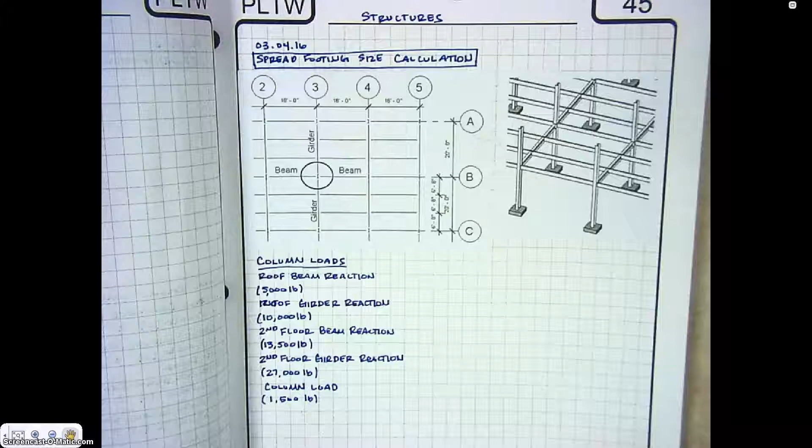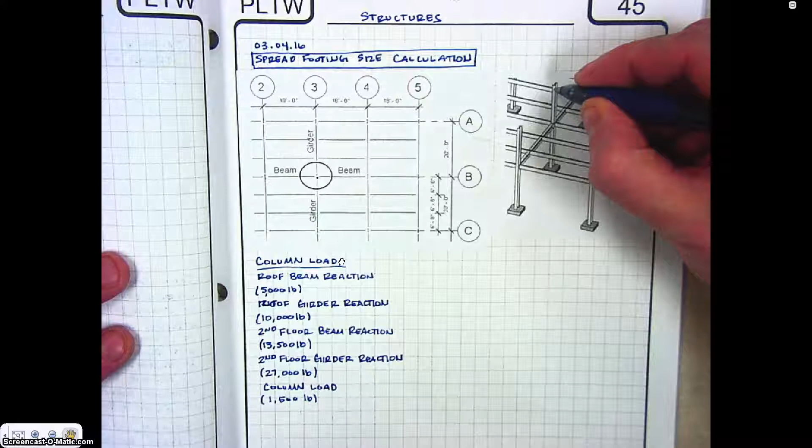All right, I'm going to take you through the steps on how to calculate the size that a footing needs to be and able to support a calculated load. In our case, we have a column right here. This is our column, so I'll go ahead and label it. It's our column. We have two girders that are hooked to the column.

So we have a girder here. We have another girder over here. So go ahead and label those. We have two beams that are hooked to our column, here and here. Beam one. Here's our other beam.

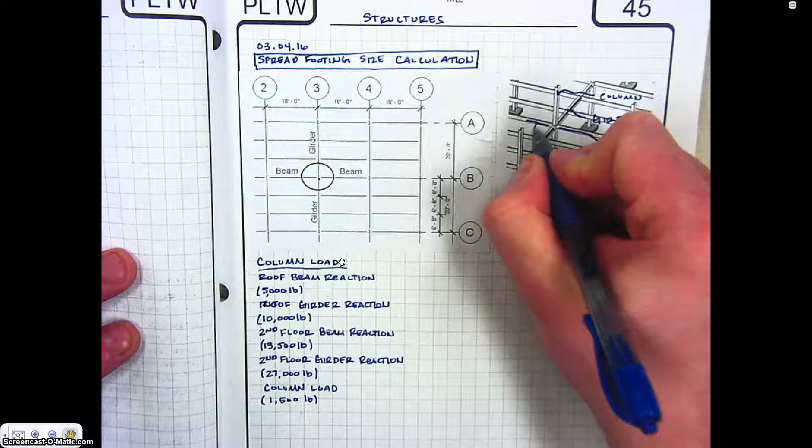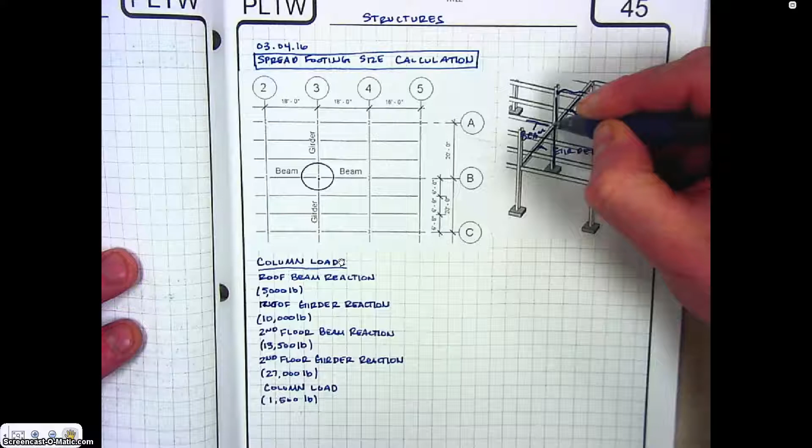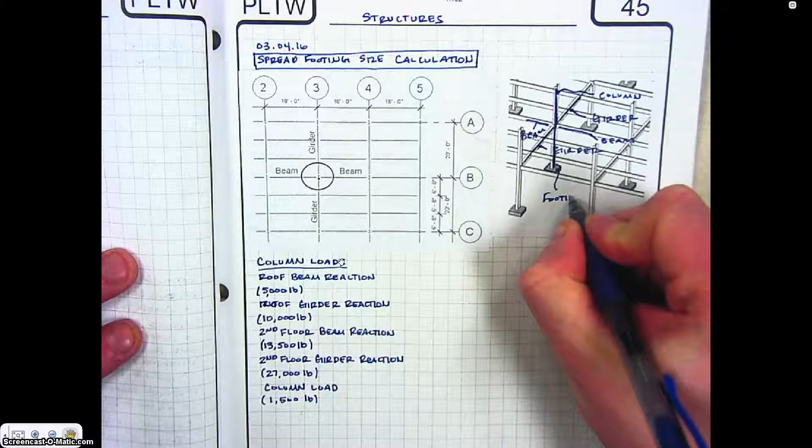And so what we're going to be doing is calculating how big this footing down here has to be to support all the weight that each of these girders, beams, and the column are supporting. And so right here is our footing. So again, what we're doing is figuring out how big that footing needs to be. In our example here, we're going to have two floors. So this column is supporting both the roof and the second floor.

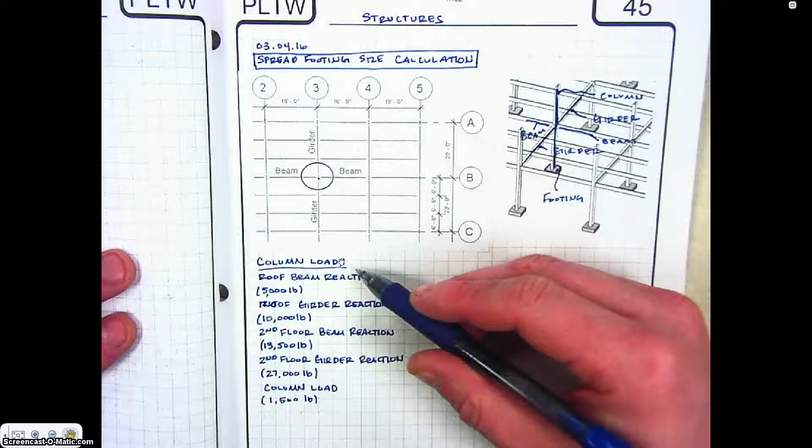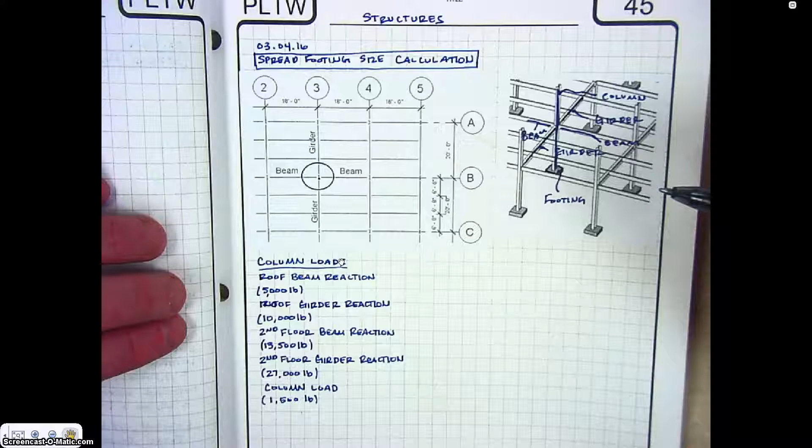And so the first thing that we'll do is figure out the total column load, or how much load is being applied to that column. For the sake of this example, we're going to pretend that an engineer has already done the calculations for the live loads and dead loads and figured out the loads on each of those beams and girders.

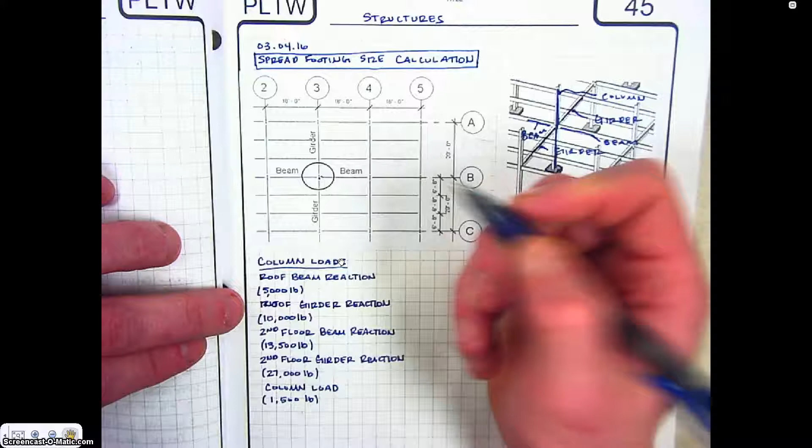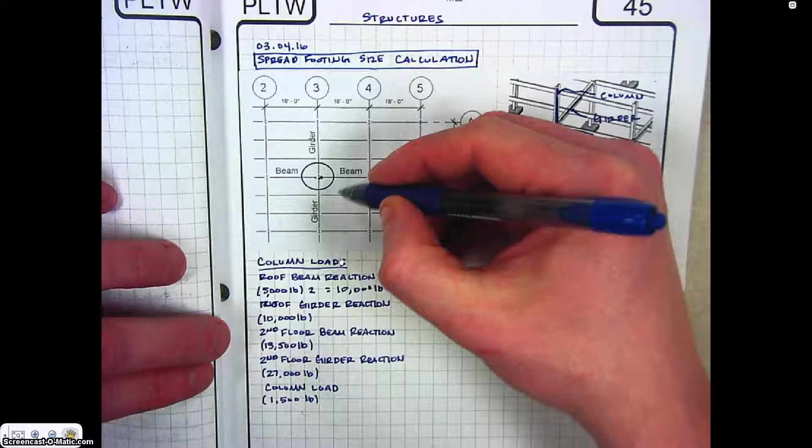And so for our roof beam reaction, we have 5,000 pounds. What we're saying is at this end of the beam, there's going to be a 5,000 pound reaction force going into that column from this point on the beam. All right, we have two beams, so we need to multiply that number by 2, which gives the roof beam reaction of 10,000 pounds. We also have the roof girder reaction. Here's our girder, here's our other girder. We have two of them. So for the roof, we have 20,000 pounds.

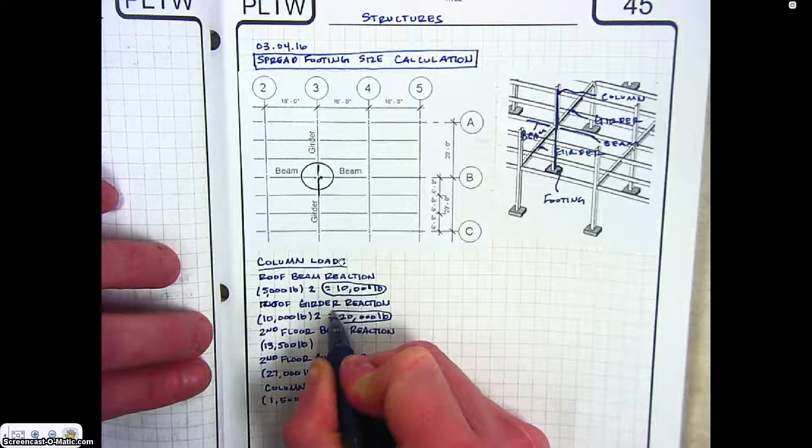Now remember that in this example, we're going to support the roof with this column, but we're also going to support the second floor. And so our second floor beam reaction, right here and here, has 13,500 pounds. So we have to multiply that by 2, and we get a total of 27,000 pounds. Our second floor girder has a reaction of 27,000 pounds. So we have to multiply that number by 2, one for each side, and we get 54,000 pounds.

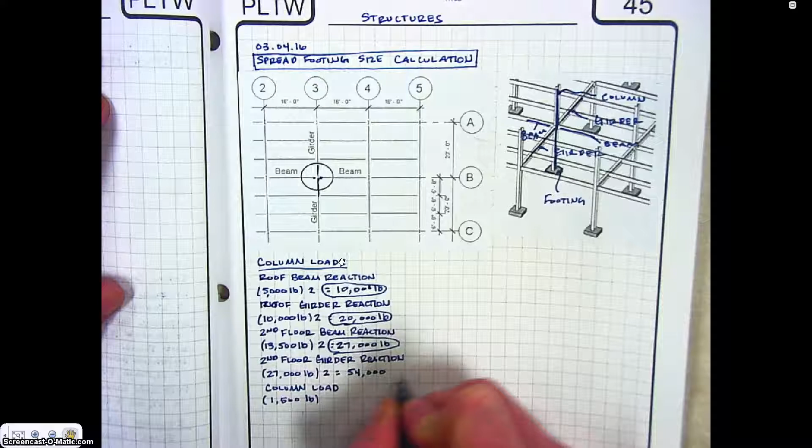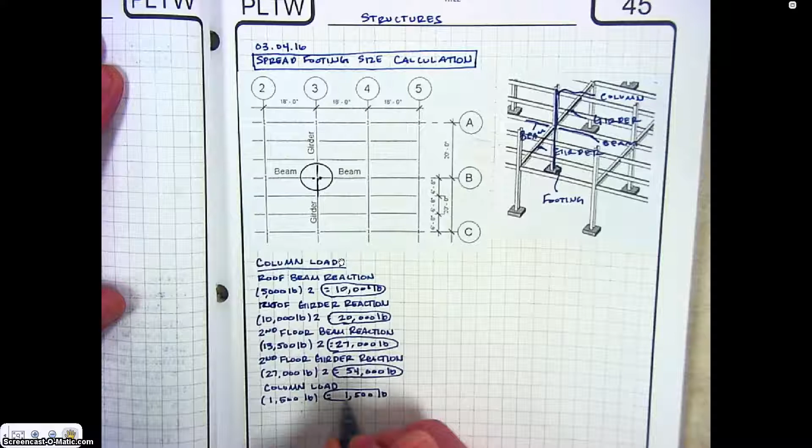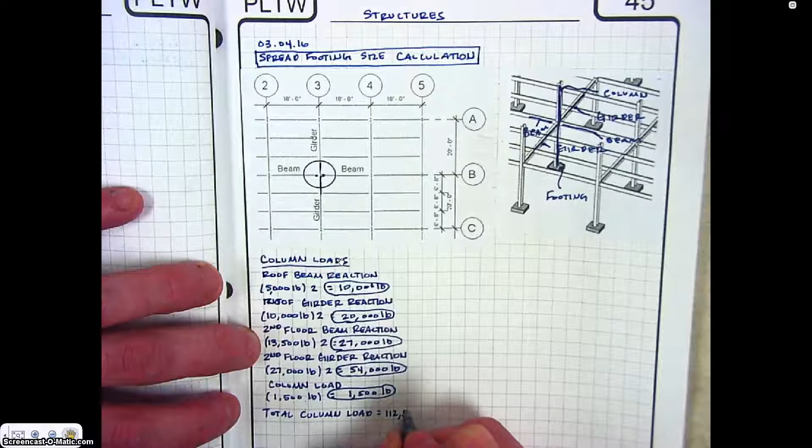Okay. The last thing we need to know is how much the actual column weighs itself. So our column weighs 1,500 pounds. We do not need to multiply that by 2 because there's only one column supporting all that. So it's just equal to 1,500 pounds. You add all those numbers up and you get a total column load equal to 112,500 pounds. So that's the number we'll use in our calculation when we're trying to figure out how big we need to make that footing.

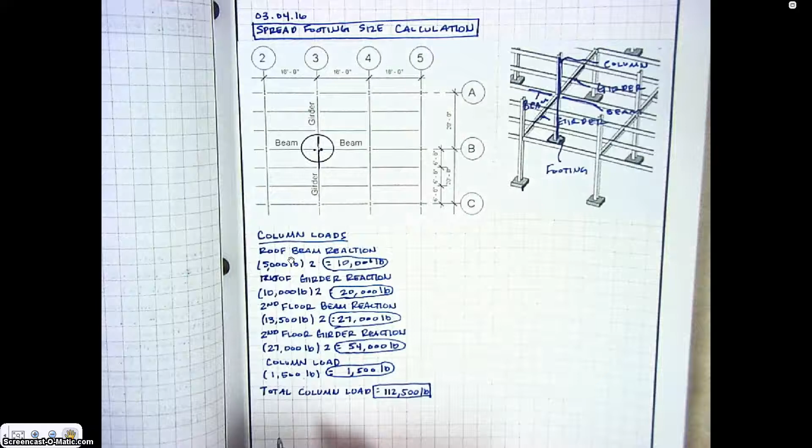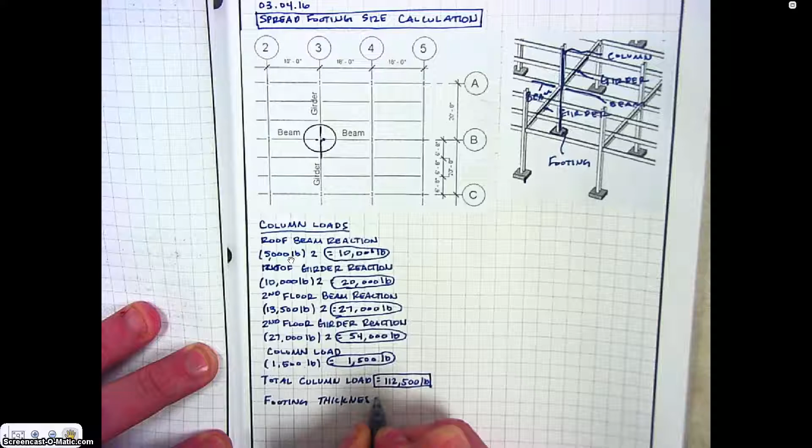We're going to have another given in our problem, and that's the actual thickness of this footing. For this standard project, we're going to say our footing thickness is going to be equal to 1 foot 9 inches. If we convert that number to feet so we can use it, it would be 1.75 feet. And so that is our footing thickness that we'll use.

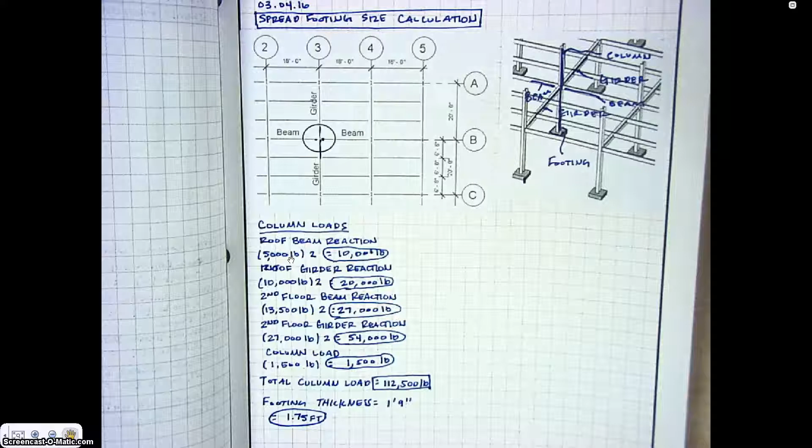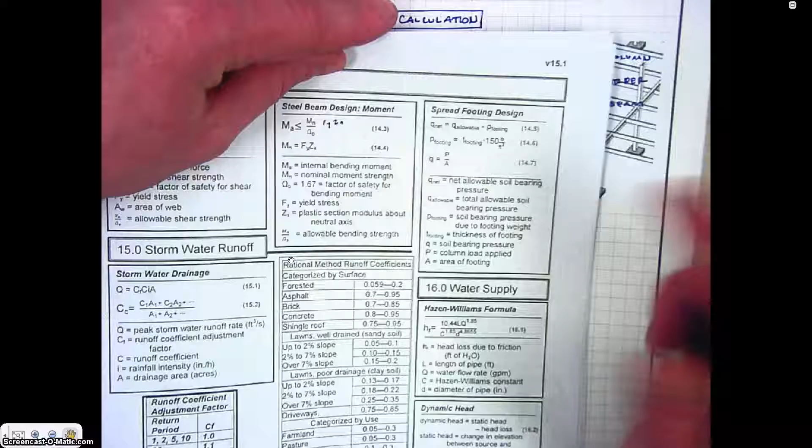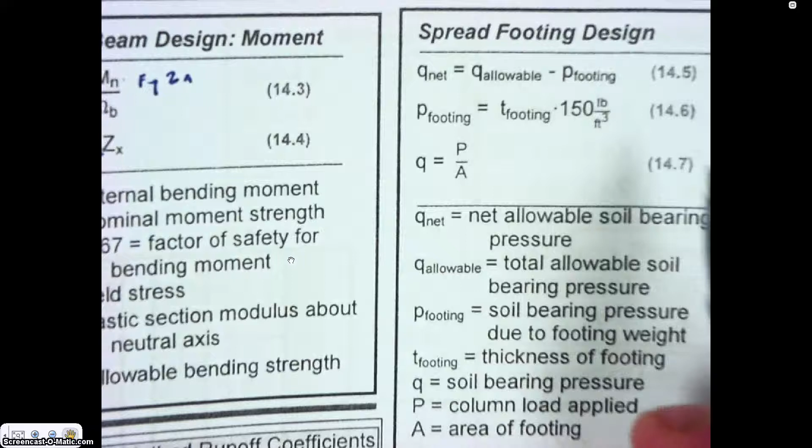All right, now we'll look at our formula sheet, and we're going to figure out the soil-bearing pressure due to the footing. If we look at our spread footing design formula, we can see that the soil-bearing pressure of the footing is equal to the thickness of the footing times 150 pounds per cubic foot. All right? And so we'll go ahead and run through that calculation.

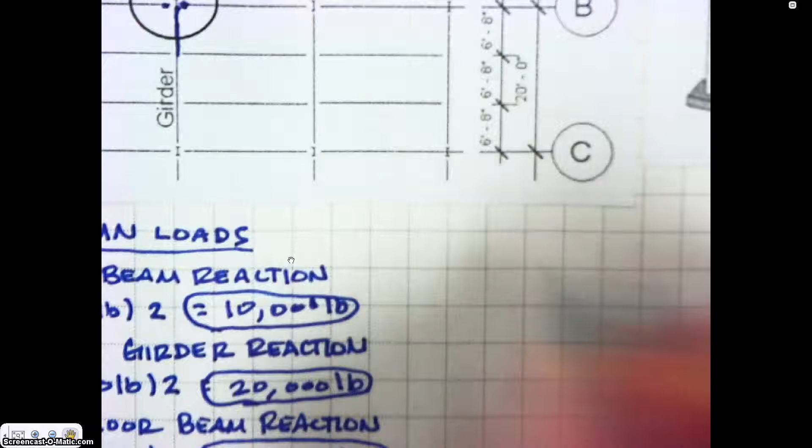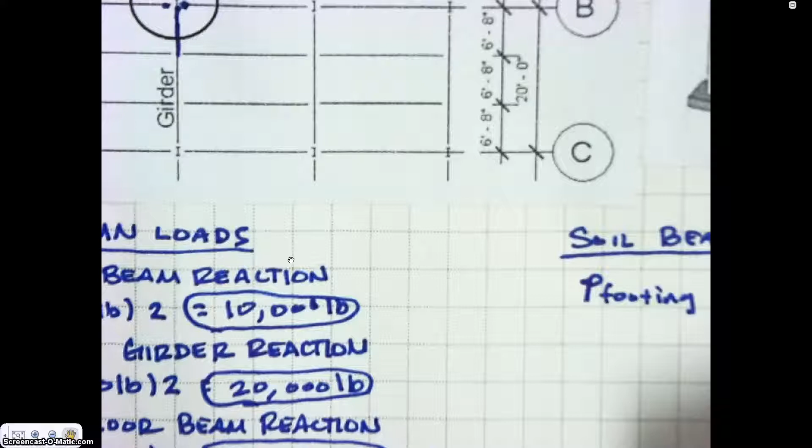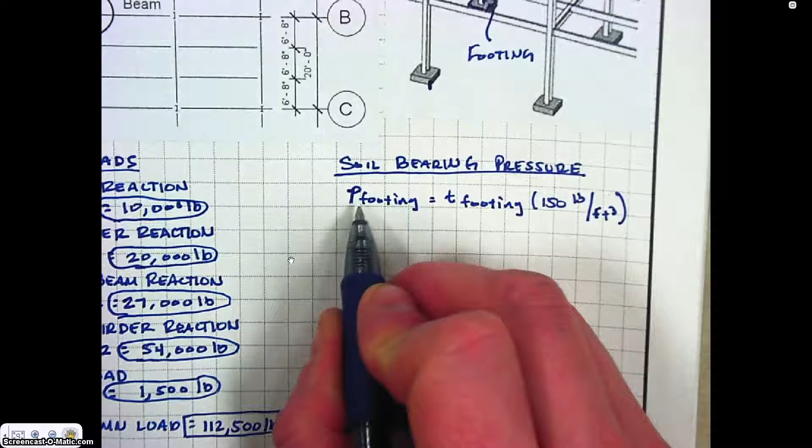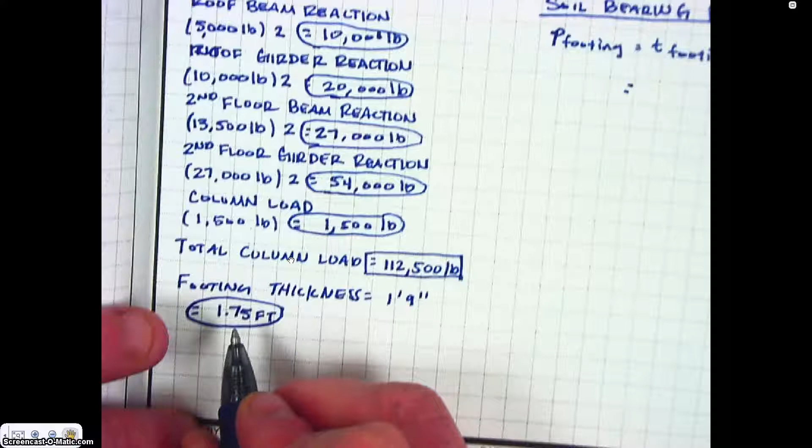So I'm going to write soil bearing pressure, which we're going to be calculating. The soil bearing pressure of the footing is equal to the thickness of the footing times 150 pounds per cubic foot. Let me zoom out so you can see that. There it is right there. So we have the soil bearing pressure of the footing is equal to the thickness of the footing times 150 pounds per cubic foot. And so we'll go ahead and put our equal sign. We know the thickness of our footing from our calculation down here is 1.75 feet.

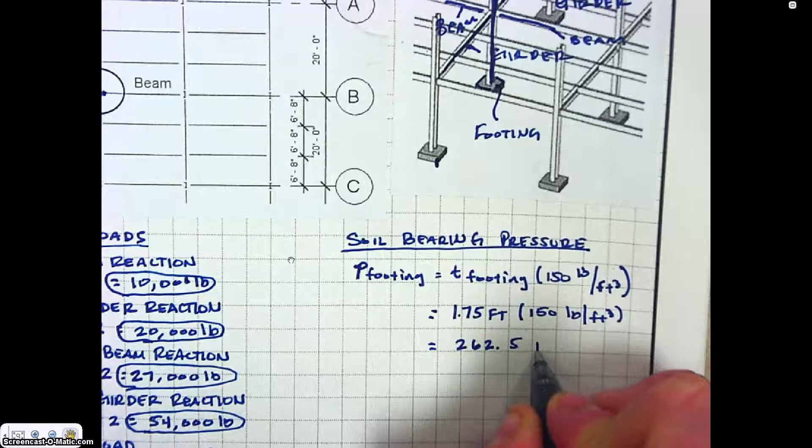Times 150 pounds per cubic foot. We get an answer of 262.5 pounds per square foot.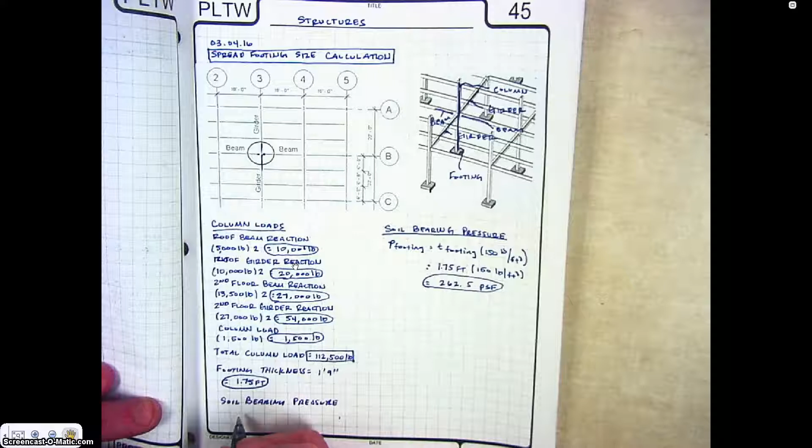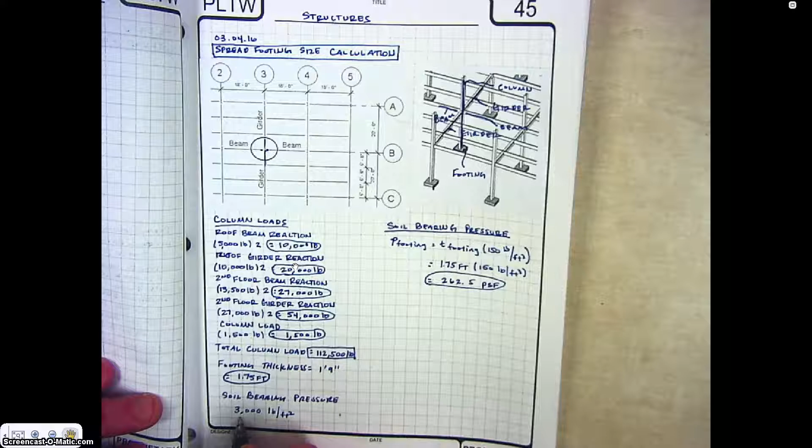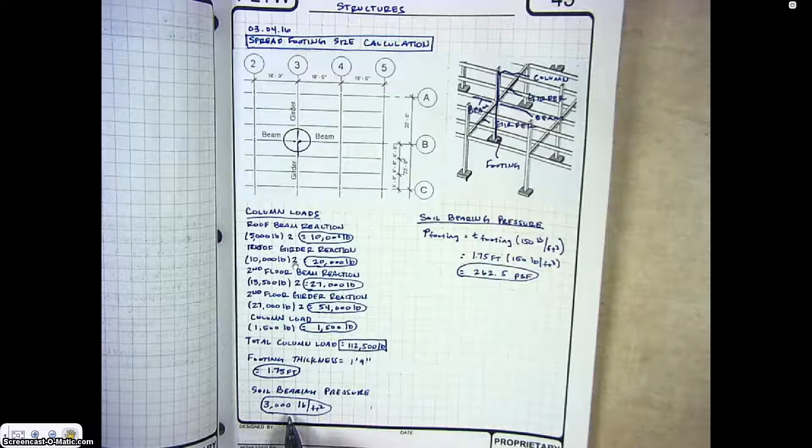All right, the next given that we're going to have is based on the type of soil in your construction area where you're building the construction. We'll have different soil bearing pressures. And so for our case, we're going to say that our soil bearing pressure is going to be equal to 3,000 pounds per square foot. And that is based on a silty or a gravel type soil. And this number is just from a table. There are soil bearing pressure tables, and there are maps that tell you what type of soil is in the area that you're building. So people have already figured all of that out.

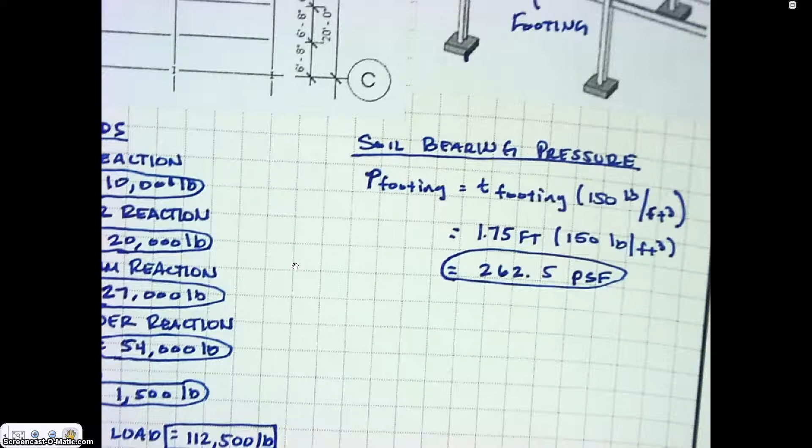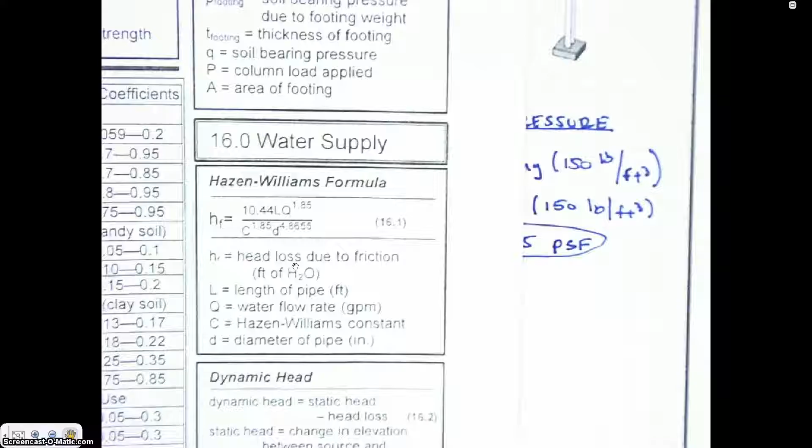So the next thing we are going to do is, if we look at our formula sheet again, calculate the net allowable soil bearing pressure, which is equal to the total allowable soil bearing pressure minus the soil bearing pressure due to the weight of the footing. All right. And so if we write out what we're doing here, the net allowable soil bearing pressure is equal to the total allowable soil bearing pressure, and again this is on your formula sheet, minus the soil bearing pressure due to the footing weight, which is what we calculated in the step before.

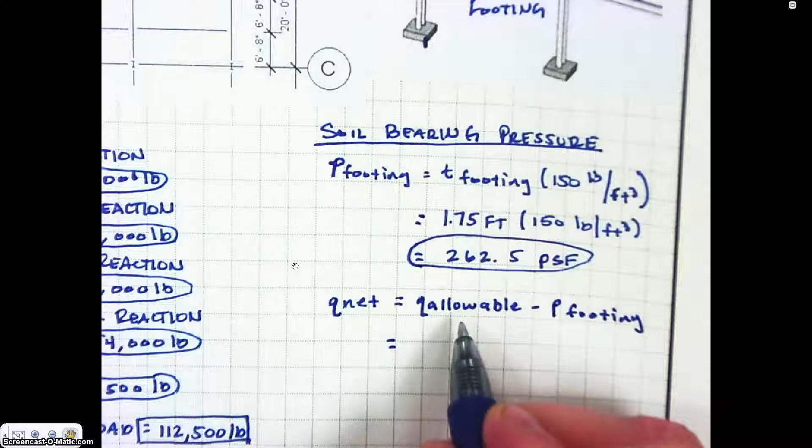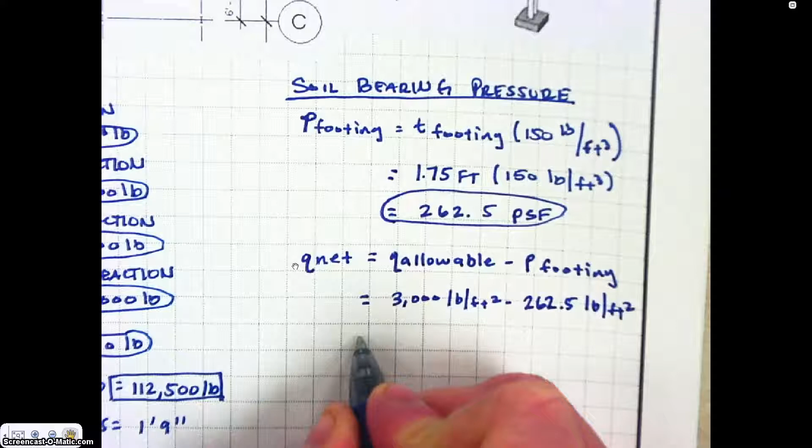So we'll put in our information. The allowable, based on our soil bearing pressure that we got off the table for our soil type at our construction site, is 3,000 pounds per square foot. We're going to subtract from that our soil bearing pressure due to the footing weight, which was 262.5 pounds per square foot, and we get an answer of 2,737.5 pounds per square foot.

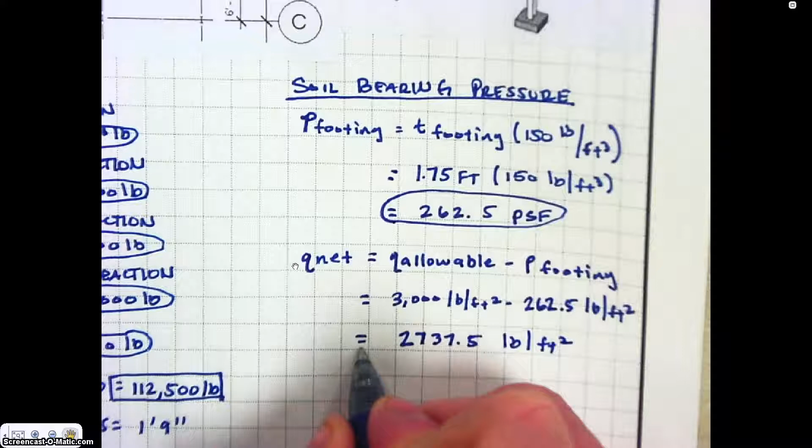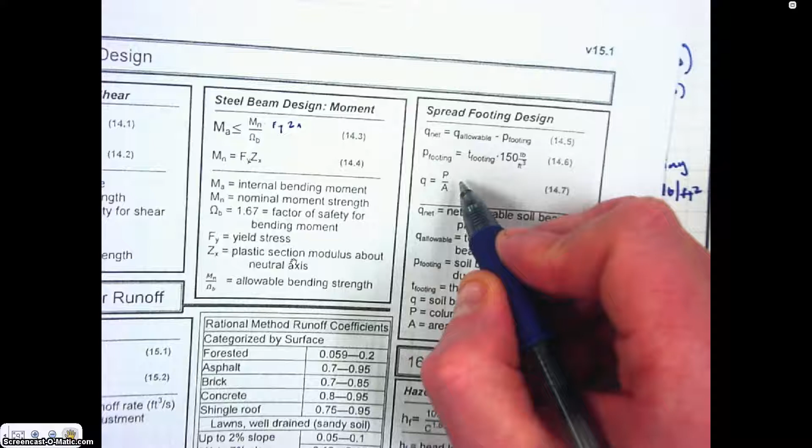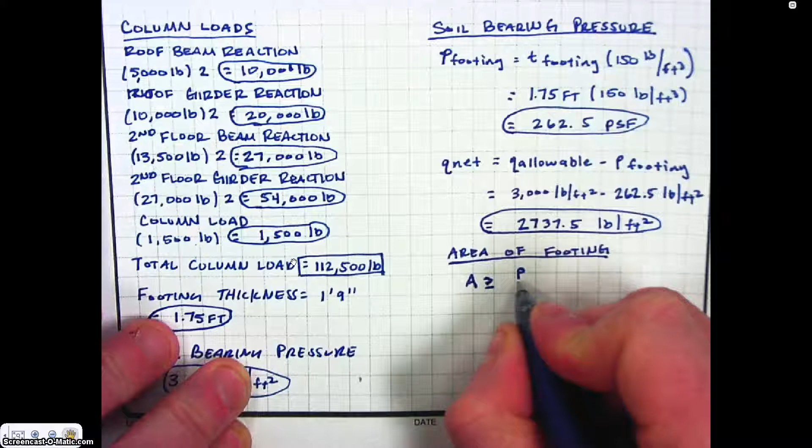All right, the next thing we're going to need to calculate is the area of the footing. If we look at our formula sheet, we have a formula here that the soil bearing pressure is equal to the column load applied divided by the area of the footing. If we manipulate that formula, by multiplying by A on both sides and then dividing by Q on both sides, we could say the area of the footing is equal to the column load divided by the soil bearing pressure. All right, and so that's going to be our formula that we'll use. So we'll say that the area of the footing needs to be greater than or equal to

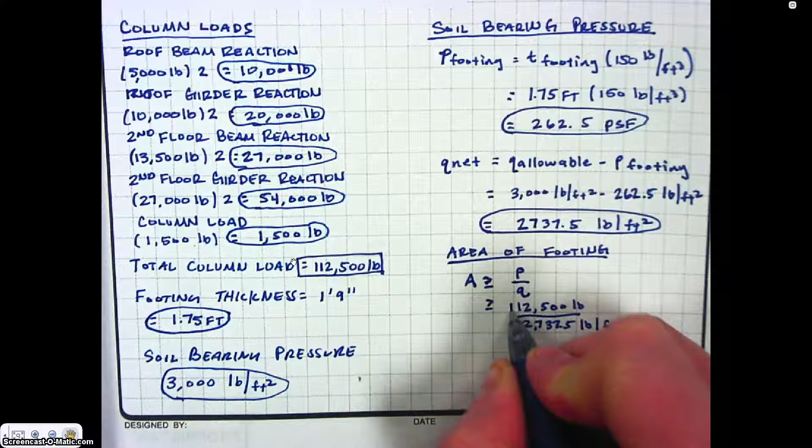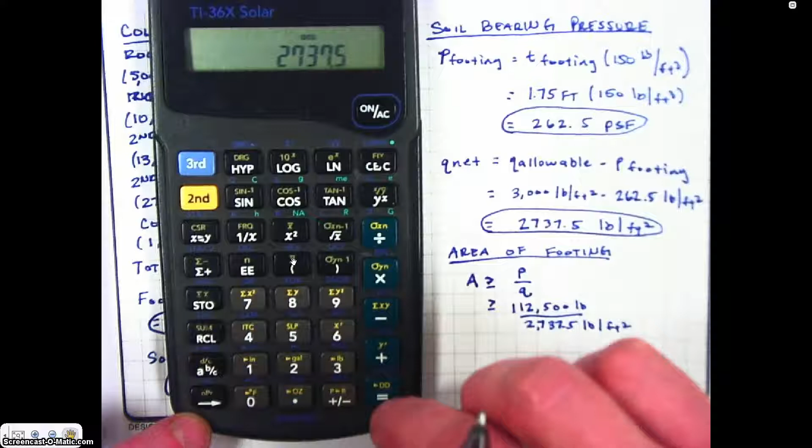the column load applied divided by the soil bearing pressure. Okay, and so our column load applied, if we go back over here, we can see that the total column load was 112,500 pounds. We divide that by our soil bearing pressure, which we just calculated, 2,737.5 pounds per square foot. Divide those numbers. This number should be 112,500. Sorry, forgot that first number. We divide those two. So let me get on my calculator. 112,500 divided by 2,737.5, and I get about 41. The area has to be greater than or equal to 41.1

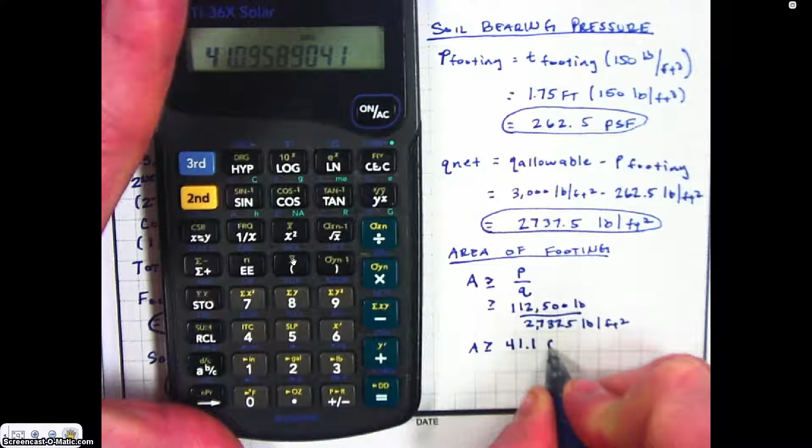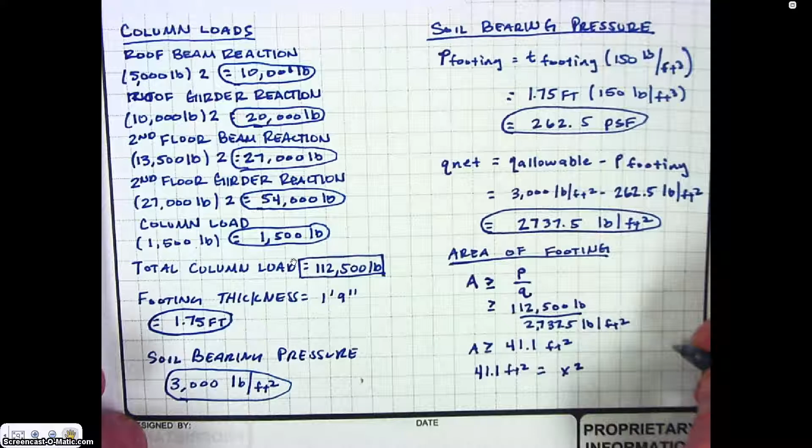square feet. Okay, and so the next thing to do would be to figure out the shape. Most footing shapes are square, and so the area of the square is just equal to the side length squared. So if we take our number here, 41.1 feet squared is equal to the side length, or in our case, the area of that footing, x squared. We take the square root of each side, and we get that our footing should take the square root of 41.1.